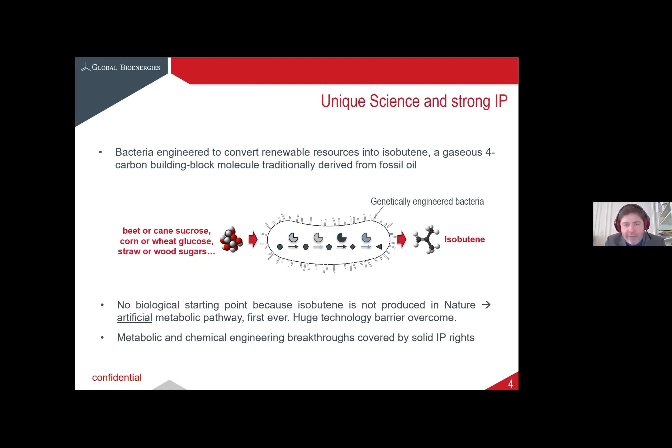We have generated a lot of IP rights. We did a lot of test and learn approaches to improve the various aspects of the process. And today the process is there. It can still be improved, and we still have efforts in the lab to improve this process. But it is already in exploitation. You see that in the lab we had a small fermenter. The largest fermenter we have at lab scale is 42 liters.

Then we built a pilot plant in 2015. And in 2017, we built a demo plant in Germany. So our pilot plant is on a sugar platform based close to Reims in France. And our demo plant is on the site of a petrochemical site with all the safety instruments that are necessary to steer that kind of process. And this demo plant is in operation since 2017. So we had a lot of ups and downs.

It's been a tough road to go from the little team of scientists we were in 2012 to people able to manage and operate a semi-industrial site. I say semi-industrial because in fact the first markets that attracted our attention were biofuels.

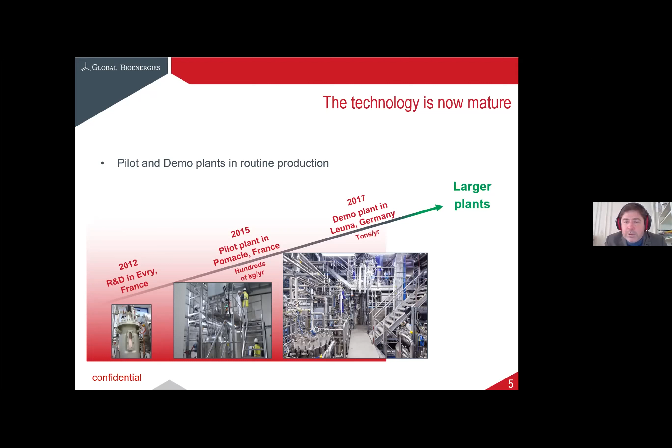The promise of isobutene in terms of market application is that if you combine 2 molecules of isobutene into a single molecule, which is named isooctane, you have the perfect gasoline. This molecule, isooctane, rings familiar: octane rating. In fact it's the molecule having the highest octane rating for gasoline engines.

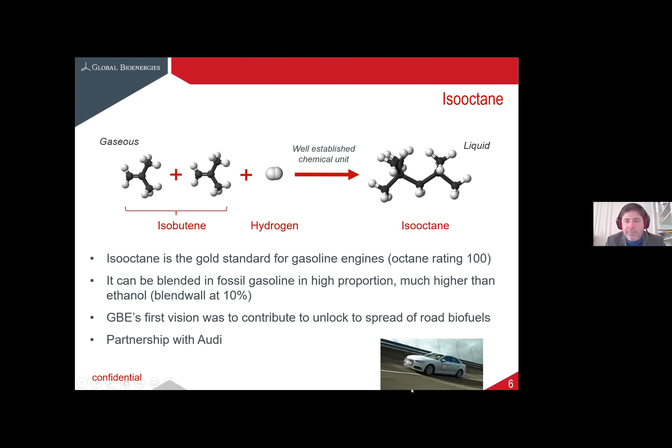And the promise was to produce real gasoline, not ethanol, real gasoline from renewable resources. So that's our first vision, and we did a partnership with Audi, the car maker, and we did a lot of things, including road testing on a circuit close to Paris, using gasoline that was produced from our demo plant. So our demo plant was used to produce isobutene, eventually isooctane, and then used for road testing. But the problem was that the price equation was not really there.

And so we looked at what we could do additionally. Jet fuel is a little bit higher in terms of price compared to gasoline. So we were able to produce jet fuel from this isobutene. By combining 3 molecules of isobutene, we get a larger molecule, 12 carbons, and this is perfect for jet fuel. And so we did some regulatory efforts, and we have this project to bring to life at some point a jet fuel industrial path, so that we can create less emissions when we use airplanes.

Why is that? It's because when you use renewable products like this one, it's no longer a one-way trip from the underground to the atmosphere. This is the oil industry. You harvest oil in the underground, you burn it, and then it creates CO2. So in the case of renewables like the ones we are talking about, it's no longer a one-way journey,

it's a cycle. So the plants, for example the sugar beets, are harvesting CO2 from the atmosphere. That's photosynthesis. We use this CO2 to produce the fuel, which is burnt and recreates CO2, ready to be harvested by the next generation. So it's a cycle which produces much less CO2 compared to the oil pathways.

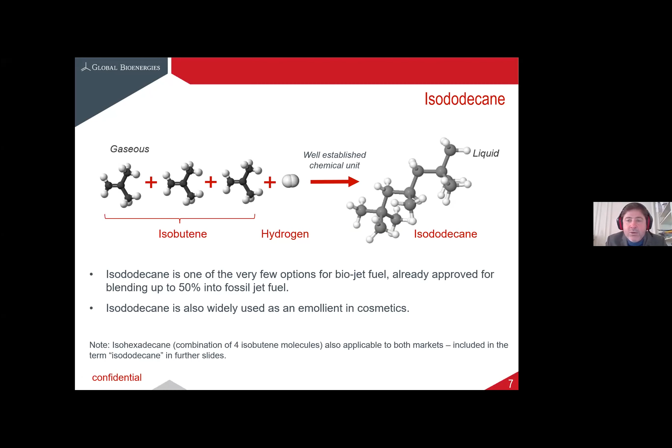And so we pushed this jet fuel opportunity, and again, not a huge traction because the price equation was not there yet. Our production was too small, in fact, to be really cost efficient. And so we looked at what we could do with this isododecane, and it happened that this isododecane is used quite massively in cosmetics.

So we started a collaboration with L'Oréal in 2016, and many other players in cosmetics have tested this isododecane, and it works well for the various cosmetic applications that we can think of. And I'm going to tell you a little bit more about what we do today in cosmetics.

In makeup, you have 3 segments: eyes, lips, and skin. And you also have makeup removers. And you have 2 modes. One mode is normal, and it's pretty much water-based makeup. And the second is long wear, so you don't have to take care of your makeup during all the day. It's about 25% of the market. It's oil-based.

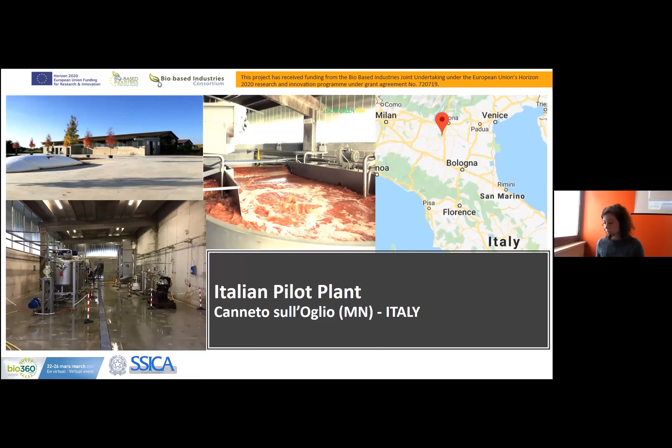This previous plant could only process the tomato byproducts. In this case, with the improvement of the pilot plant, the types of byproducts processed are increased, and also the quantity of residues processed is increased.

Tomato is one of the byproducts treated in this pilot plant, and specifically peels and seeds, in this case, are separated. From peels, cutin and lycopene can be extracted through a cascade approach, while seeds are allocated to biogas production together with the waste generated by the processing of the tomato peels.

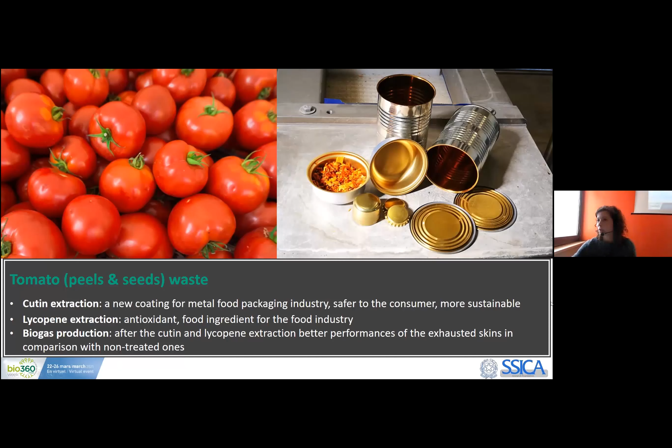The cutin is a substance of polyester type, mainly composed of fatty acids as building blocks. This substance can be extracted from tomato peels and can be used, by additional treatment, as a building block of a biolacquer. A biolacquer intended to cover and protect metal food packaging.

At this stage of the project, we increased the productivity of the cutin, and this allows us to produce the cutin biolacquer on an industrial line, at industrial level, we can say. And after this step, also the application and the production of metal cans has been possible on an industrial line thanks to an industrial partner that can perform this activity.

So we reached the production of about 6,000 cans of half kilo size, and about 10,000 cans of smaller size, as for example the ones used for tuna.

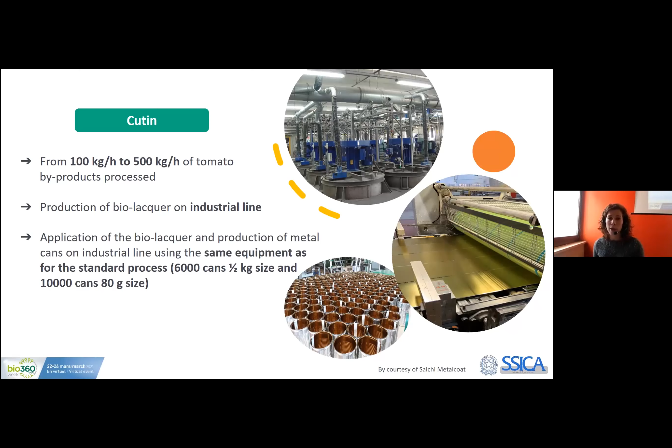The lycopene is extracted, as said, through a cascade approach from the peels discarded from the previous process. So this is an additional valorization of tomato byproducts. Here, for this molecule, we started from a laboratory scale and we achieved a pilot scale that can process about 40 liters per batch of extract. The optimization of this process is still ongoing and under evaluation, but we have promising results because each time we can improve our yields of extraction, which is the main goal of this type of extraction.

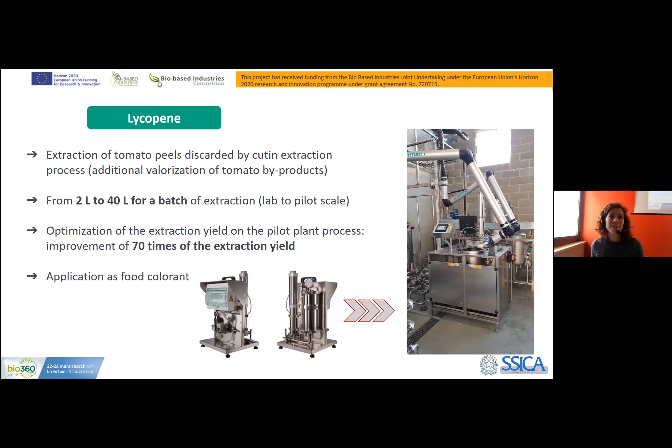The lycopene, as you all may know, is useful for food applications, and in this case will be applied as a food colorant to furnish the red color, as you all know.

Also, tomato culled fruits and plants are used in this plant, so we don't waste anything from tomato, and from this waste, compost and hydrocompost are produced by the know-how of the University of Almeria, one of the other project members. The compost is a solid fertilizer, and it is made, as you can see in the picture, with the residues of plants and culled fruit, and it is prepared by the composting process.

At the end of this composting, part of the compost can be processed to prepare the hydrocompost, which is a liquid fertilizer, mainly composed of humic substances that can improve plant growth and act as a biostimulant for the plants growing.

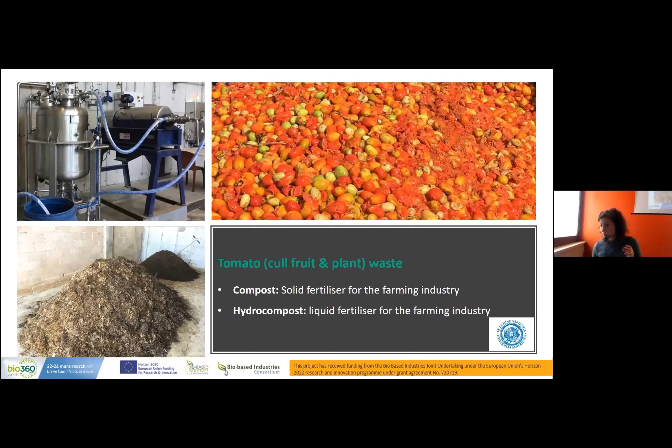Concerning the cereals, specifically, we used wheat bran. From wheat bran can be extracted active molecules or molecules of interest for different sectors. In this pilot plant, ferulic acid is extracted, also fibers and proteins.

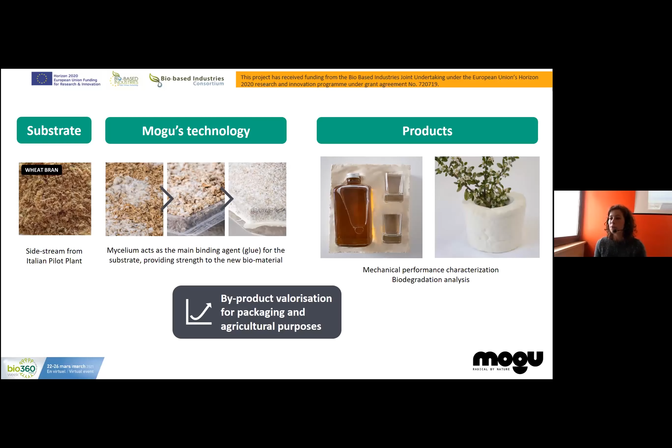Wheat bran can also be used as it is to formulate composites. In this specific case, by the know-how of Mogu, another partner, the wheat bran is used as a substrate for the growing of mycelium and to prepare biocomposites that can be used as packaging, as can be seen in the picture, or as pots for the agricultural sector.

The fibers obtained as byproducts of the wheat bran processing can also be added to biopolymers for the production of biocomposites. For example, Agrimax selected to produce pots for the agricultural sector. In this case, several percentages of fibers added to different bioplastics, biopolymers, are used for the preparation of the formulation of the pots you can see in the picture. The technology used for this type of prototype is injection molding, available in Femto Engineering and by the know-how of INSTM.

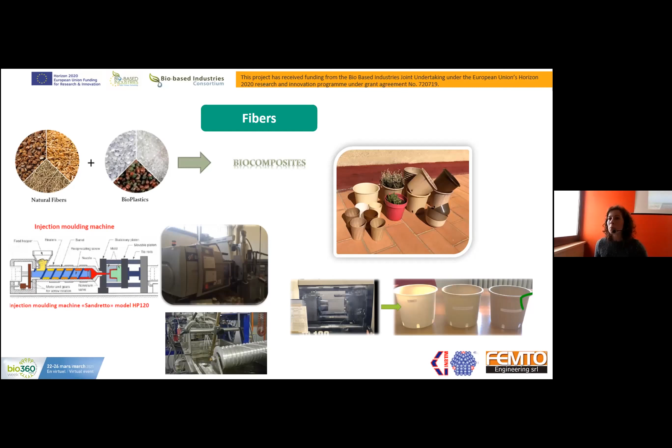Last but not least, the ferulic acid, which is extracted with the know-how of the University of Bologna, is extracted by a chemical process. With a chemical process we can obtain the molecule indicated in the picture, which is used as a building block for the production of biopolymers, biopolymers that can be used for their mechanical properties in the packaging sector. The ferulic acid could also be used for its antimicrobial and antioxidant properties. In this case, it can be used as an additive in food applications.

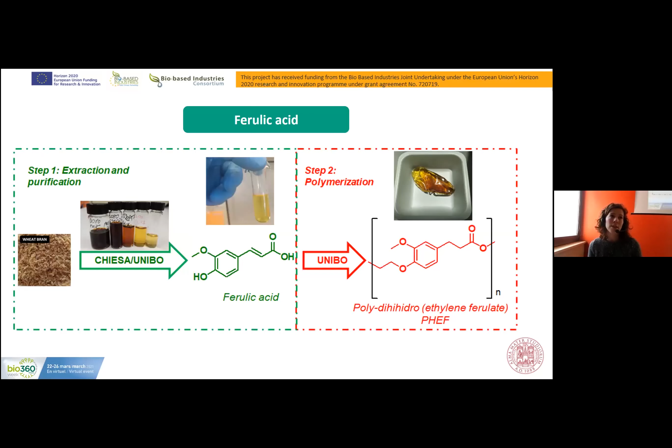To continue the valorization of the byproducts and the activities of the biorefineries, the project developed a platform, a very ambitious platform, a tool that can make a connection, a network between stakeholders and the biorefineries. This platform is a tool that can help farmers and food industries to dispose of their waste and byproducts. The biorefineries can manage a supply network of agricultural and food industry waste providers, and function as an intermediary online market of these byproducts, helping to meet supply and demand.

This platform will bring together stakeholders, creating a network with the biorefineries in order to guarantee their operativity at maximum capacity all year round, avoiding the seasonality of the products.

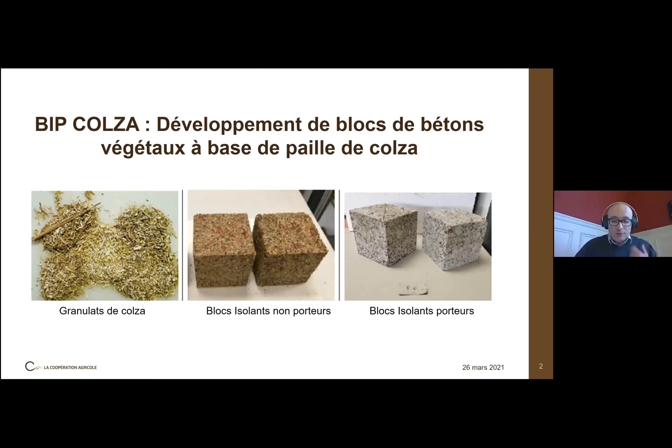Now, above all, I think it's important to note that the use of biomass in the concrete sector really is becoming reality in Europe. More and more we see a lot of byproducts being used in this sector, but it's important to note that new forms of biomass are gradually appearing. Lots of experiments are being carried out, for example, on this rapeseed straw, or also on linen straw, as we might call it.

Now, what led us to show a particular interest in the construction sector and in the different types of concrete? Well, basically, concrete, initially speaking, is a mixture of different granulates. One of the materials is going to be cement, for example, and the other is lime. And the idea is to replace these minerals by some products of plant origin. So replacing gravel by straw, basically.

And there are specific properties that we are able to provide thanks to the raw materials we can produce. This makes it possible to provide good quality heat insulation. And at the same time, we're benefiting from the fact that these products are easier to produce and use. Our plant-based concrete has a positive impact on the environment because throughout its life cycle the plant performs certain natural activities, among which is the fact that the plant stores carbon.

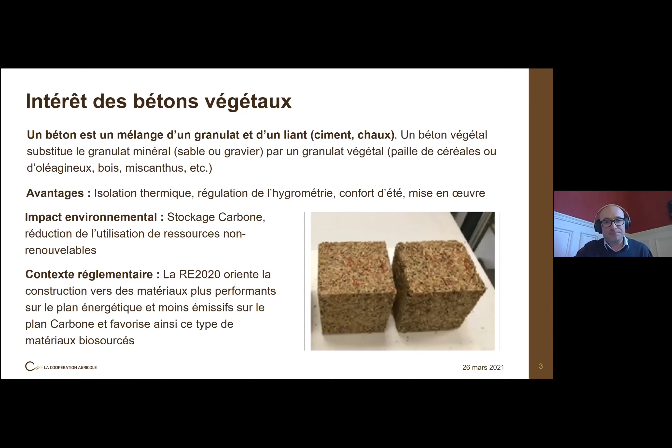So we then have a second family. These are what we call the fibres that have a good future. These are cereal straw, rapeseed straw, and also linen, oily linen straw. All of these products are gradually being used more and more. But let me say that the sector is not quite as mature as it needs to be. It's only in the process of being structured.

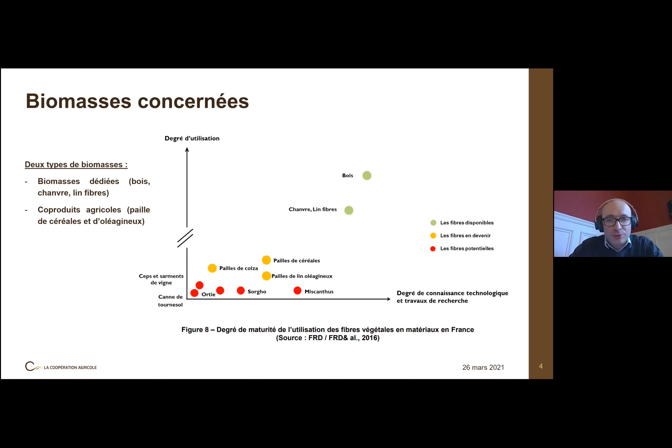The third family is what we call the potential fibres. These are the ones I believe have a great future ahead of them in terms of biomass. A lot of R&D work is going on at the moment, but a lot of the work has not yet been validated. We're not yet 100% sure of the industrial and commercial interest of these products or how we're going to be able to use them in the future. So what made us choose straw for plant-based bricks?

So our rapeseed project, we believe, is a project that involves lots of stakeholders, local stakeholders and a lot of cooperative farms. This type of cooperative approach means that it's up to the different farmers to become shareholders, clients, and also suppliers. So within our cooperative, what we look to do is structure all of the different markets.

And within the scope of the project, we've decided to work with two cooperatives, Ceresia, that brings together 4,400 farmers, from the upper part of France, the Lille area, right through the northeastern part of France. So basically, today we have the possibility of bringing together many stakeholders for the production of the raw material that I've been referring to.

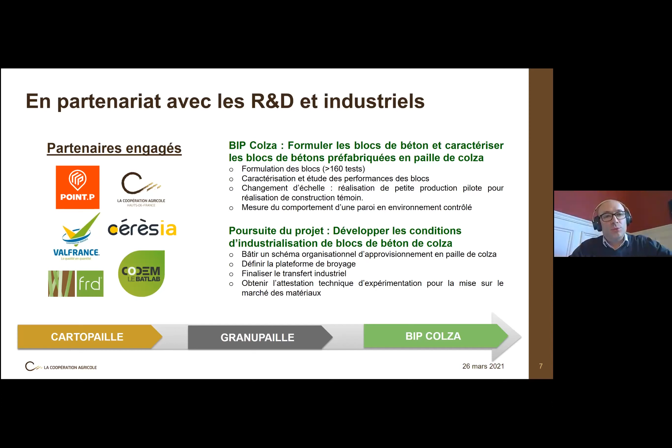So there are 3 major challenges behind this. We've broken them down as follows. The first challenge is an agricultural challenge. We have to be able to use the biomass for this kind of project. We need to be able to source it. So we've got to have a foot in the field. And the second challenge is that when we're taking the straw outside of the field, this mustn't negatively transform the future soil.

And also it's important to have contracts between the producers and the industrialists using the straw. There needs to be some form of contract, something binding about the price and the volumes and the ability to continue production over time. So everything had to be created in terms of production, the crushing machine, the formulation to make the concrete blocks, but taking into account, of course, variability in terms of raw material.

The straw as a raw material is something that changes and it needs to be managed properly, because we're talking about something that is industrial. We're converting it industrially. The last step is that of commercialization. So this starts, of course, by carrying out technical assessments to make sure that what we're doing is recognized properly.

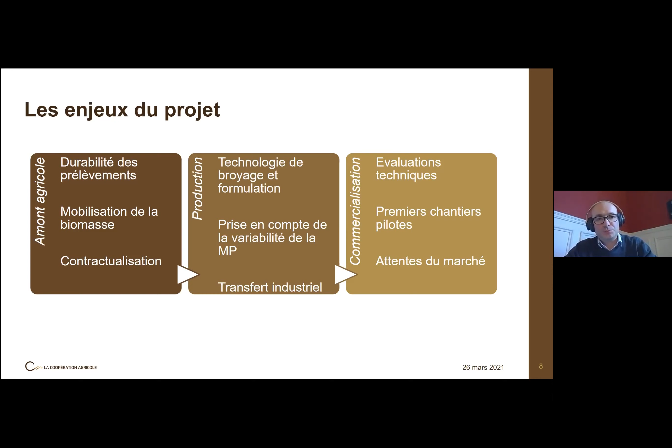And then, of course, it involves setting up the first projects, the pilot projects, to try out the technical feasibility and to check that we are meeting market expectations. So to do this, we've decided to work collectively. All of the partners didn't want to be alone with this project for several reasons.

First of all, with this kind of project, it's important to be able to supply a considerable amount of material. If we want the product to be developed in the future, you've got to industrialize the process. And this is so that the production costs are in line with market needs. So if it's just a small scale, the product will always be more expensive than the basic commodity.

The second reason for working collectively is to share risks. You know, in research and development, it helps to pool costs. If each person was working alone in their own corner, they would have to bear the costs alone. And finally, it's important to have partners who have know-how that you don't have yourself. This means it's important to have professionals for each step of the way.